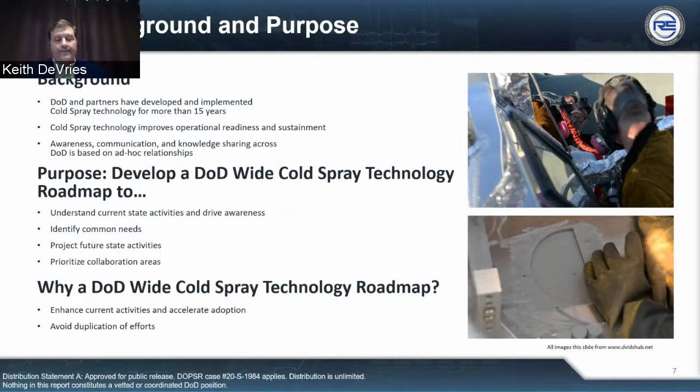Next slide, please. Shown here is a subset of the priorities identified by the team in the road mapping sessions.

The JDMC has commissioned work in several of these areas since the roadmap was published, with the express intent to expand understanding and adoption of cold spray as a cost, and more importantly, time savings approach to sustaining our vehicles, our vessels, our platforms, and our systems for warfighter use.

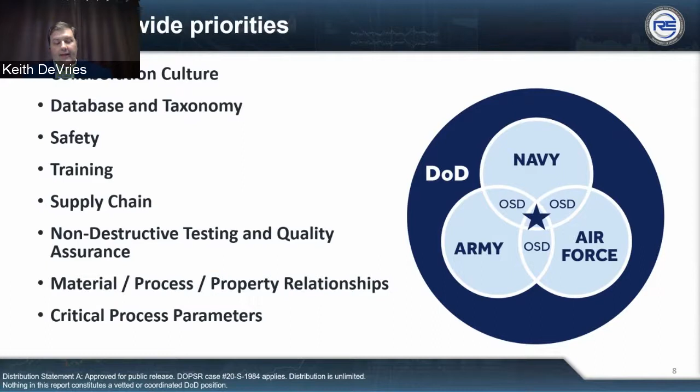The panel members gathered today will be expanding on their individual service efforts to address roadmap challenges and further their warfighting capabilities by developing cold spray as an industrial process.

Next slide, please. Our first presenter is Bill Baker. He is from Marine Corps Logistics Command in the Maintenance Management Center, where he is the lead engineer for the MMC and provides engineering guidance, technical support, and technology insertion for the workload executed through MMC and their commercial sources. Mr. Baker, it is over to you.

All right, thanks, Keith. Hey, this is Bill Baker. I just want to give you an overview of where the Marine Corps is going as related to cold spray. So we can go to the next slide, please. Okay, one more.

So a little bit about us. Marine Depot Maintenance Command is our official title for our Marine Corps depot. There is only one Marine Corps depot, but we have two locations. One is in Albany, Georgia, and the other is in Barstow, California. Similar capabilities at each of our plants, and they work the same types of equipment.

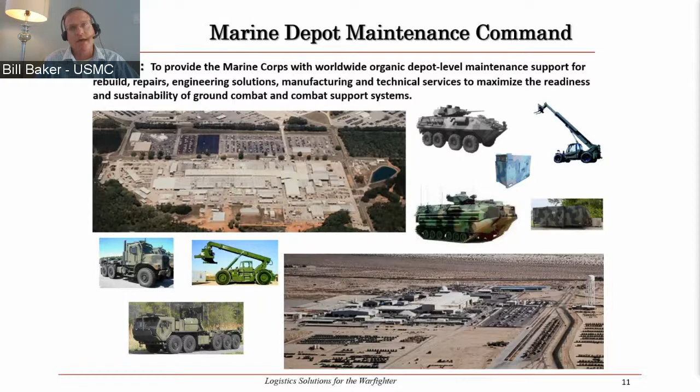We basically rebuild all types of ground combat equipment. So if you think about armored personnel carriers, light armored vehicles, engineering equipment like forklifts and bulldozers, we work trailers, trucks, Humvees, anything you can think of on the ground side, even rifles. So when we talk about cold spray applications, we're talking about supporting this depot maintenance. We completely repair or rebuild these ground combat systems based on our customers' requirements. During that maintenance operation, we're going to have things that need repair, and then we bring them back up to basically condition code A, which is like new.

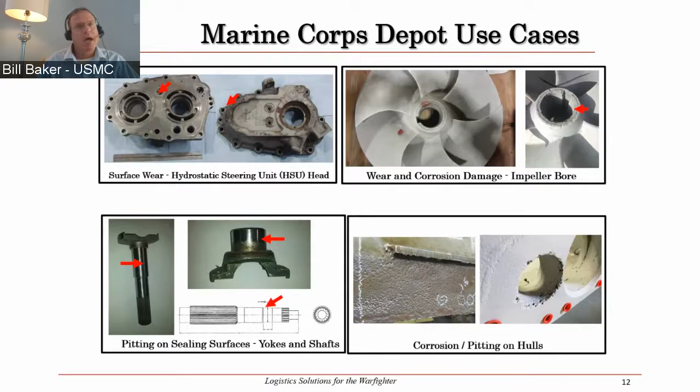I just want to give you an overview of some of our use cases. So the Marine Corps is just getting started on cold spray applications. We actually talked about cold spray before - I went through my old notes with one of my old jobs, and in 2002 we looked at cold spray applications, but we didn't have the funding and didn't have the drive or the roadmap that we have today. So we're really excited to finally be pushing cold spray across the Marine Corps, and we're starting to get some of these applications.

The first one you see up there is our hydrostatic steering unit head. This is one that the Applied Research Lab at Penn State is helping us develop a repair for. This is a pump housing that has some significant wear on it. It's expensive and it's hard to get. So they actually developed some new spray techniques and innovative masking techniques also, because you see all those little holes are oil passages. They're able to come up with ways to get the coating to go to the edge of that oil passage, but still make sure the oil passage wasn't blocked.

So we're currently waiting on approval to use that. We're going to do some real world testing. Also, that impeller bore is another one that we're working on right now with Penn State, and actually the Army Research Lab is helping us with that one also. So inside that impeller, it's also expensive and hard to get, and that aluminum impeller wears over time and also has some significant corrosion issues. So they're helping us develop a repair for the inside of that bore. They've got a mock-up complete right now. Once that's complete, we're going to spray an actual impeller and do some testing on that.

So those in the Marine Corps are the only two applications that we're currently working on at this time - we're just really getting started, the first two. Down at the bottom of the screen, you see some potential future applications. Every piece of ground combat equipment that we have has a shaft on it, and all those shafts have seals or O-rings that keep the oil passages sealed. And those O-rings and seals cause damage and pitting over time. So we're hoping that we can actually repair these yokes and the mating housing so we can bring these pieces of gear back operational.

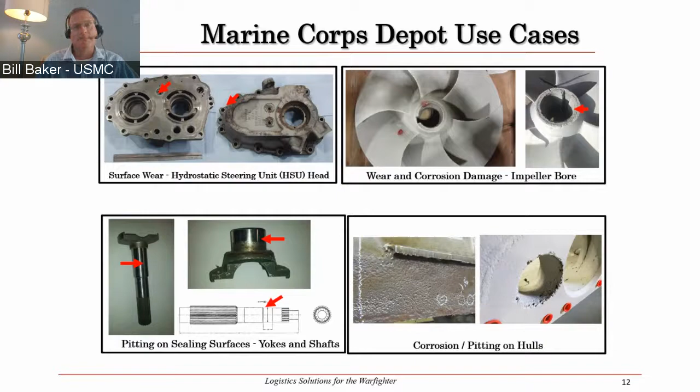For the Marine Corps, we wanted something semi-portable so that if we had to move it, if we needed to take it to a vehicle instead of bringing the part to it, we made sure that it was able to reposition, move it to a different building, move it to a different vehicle, move it outside, whatever we had to do - we wanted to be definitely flexible. Our Barstow plant has a similar system on their budget for FY22, and they actually have some low pressure systems that they've had for probably about 10 years. But for the Marine Corps, we don't have a whole lot of applications for those low pressure systems, so we're going to these high pressure systems that you see here.

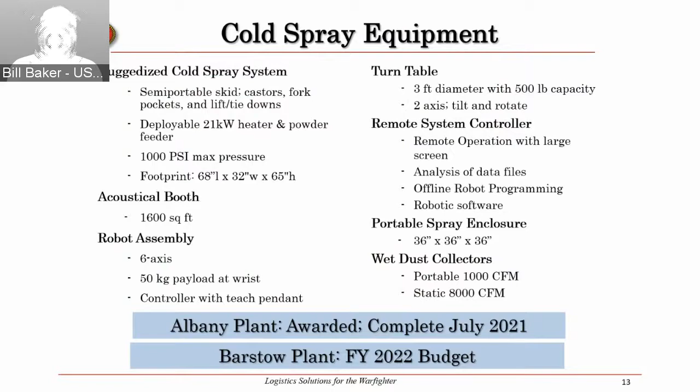So just to wrap things up, we're looking to repair all types of components and parts as part of our ground combat depot maintenance. Our focus right now is on depot maintenance, but the fleet has the same type of applications too. They're already calling us on some particular issues, so as we get smarter, better, we're going to take our lessons learned to the fleet too. We can also repair their parts at the depot and send them back to them.

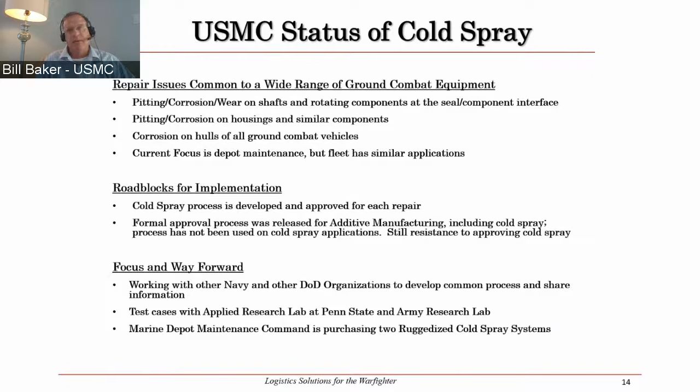We are having, as part of our roadblocks, some issues with approval. We only have 2 parts so far, but getting approval for those can be difficult. So we've been working with our OSD team and other members of the Navy and the Army to come up with better ideas on how to get these cold spray applications approved quickly, and I think that's going well. We're going to follow the same process we have for additive manufacturing, so we think that's going to help us make decisions a little bit faster.

Like Keith said, we're working with the Navy and other DoD organizations to really push this technology. Because we are part of the Department of the Navy, we're working directly with them every day on cold spray applications, trying to steal as much from them as we can because they're doing great work. And that's all I have for today. Thank you.

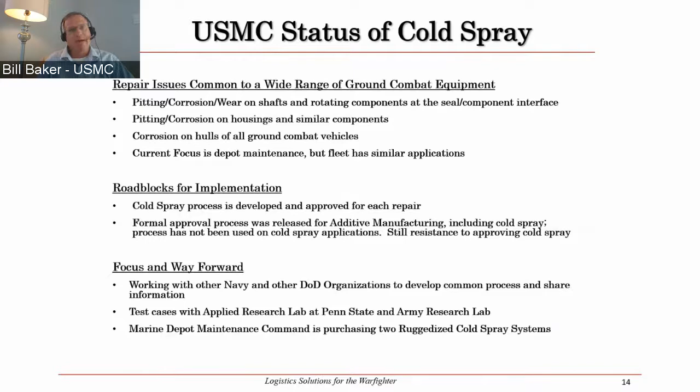Thank you so very much, Bill. I'd correct you only minorly - we're not stealing from the Navy, we're leveraging the Navy. Yes, sir, I like to call it stealing, I'm from South Georgia. Thank you - it's a very honest way of approaching it.

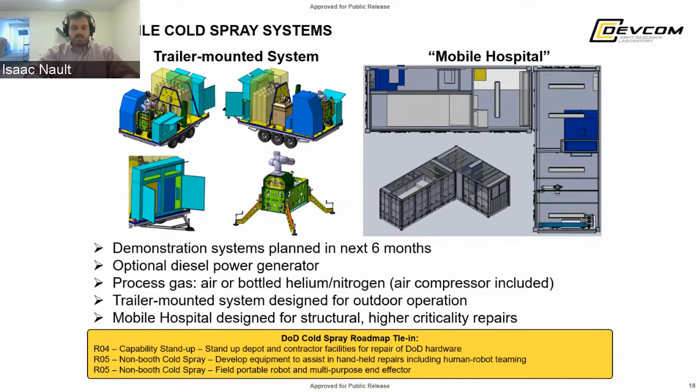There's a lot that goes into additively manufacturing parts with cold spray, and there's a lot of development going on there, with a lot of tie-ins to the cold spray roadmap. One of those tie-ins is we're developing methods for processing deposits after cold spraying to enhance the material properties, and that ties into priority number 7, process enhancements.

We've also developed software for developing tool paths to manufacture parts to near net shape, and that ties in with priority 8, engineering for structural and critical applications, and priority 12, part manufacture.

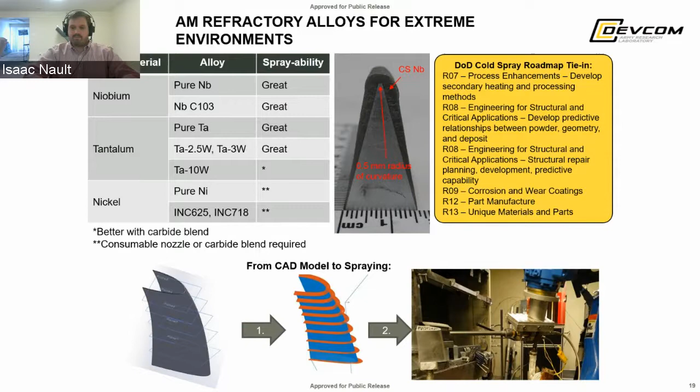We have developed and commercialized coatings, powders rather, for wear and impact protection. These are based on blends of carbide and metal, and we call them WIP powders, where WIP stands for wear and impact protection. We have commercialized 3 primary varieties. You have WIP C1 and WIP C2, which are a little bit cheaper to manufacture and can be sprayed with nitrogen. WIP W1 has better material properties, so that's really for higher criticality applications, but has to be sprayed with helium, so it's a bit more expensive.

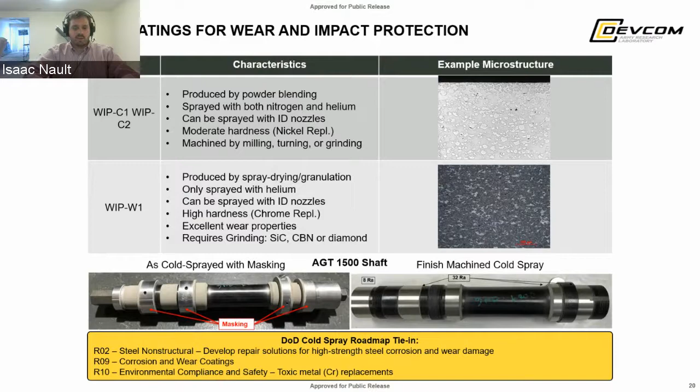These coatings for wear and impact protection tie into the roadmap through priority 2, steel non-structural repair, because this is an ideal material candidate for repairing high-strength steels, and also priority 9, corrosion and wear coatings, and priority 10, environmental compliance and safety, because this is also an ideal material for replacing toxic chrome coatings.

We're using cold spray for structural repair, and structural repair is defined as a situation in which you would expect that the cold spray deposit will bear a significant amount of load. So we're talking about more than just coating here. And this ties in with the roadmap for priority 8, engineering for structural and critical applications.

Much of the work we've done in structural repair has been focused on aluminum alloys. We've developed processing conditions and best practices for structural repair of aluminum. We've also commercialized powders that are pre-processed, such that when they are properly sprayed, they will have ideal material properties for structural repair in the as-sprayed condition. So there's no further processing required, which is critical for repair applications.

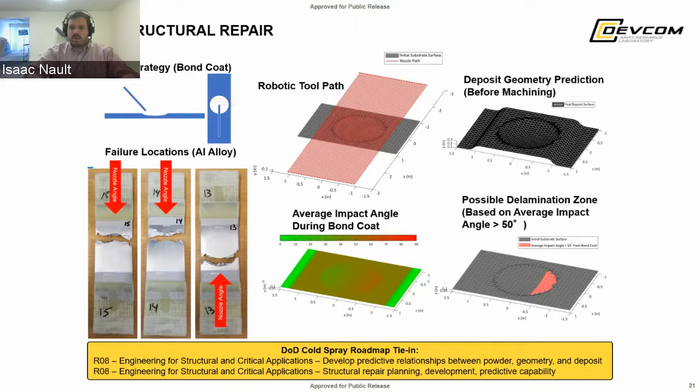Finally, we're using cold spray for inner diameter coatings, and this has been made possible thanks to the design of miniature nozzles. We've designed nozzles that are actually capable of fitting in inner diameters as small as 2 inches, for both WIP materials and aluminum alloys. The aluminum alloys are a little trickier because they require a consumable high temperature polymer nozzle, but we have developed that at this point.

These all tie into the roadmap through priority 6, engineering, and priority 7, process enhancements, because we really had to understand the relationship between nozzle design and cold spray coating quality in order to design these nozzles. And so that's what I have for today. Thank you.

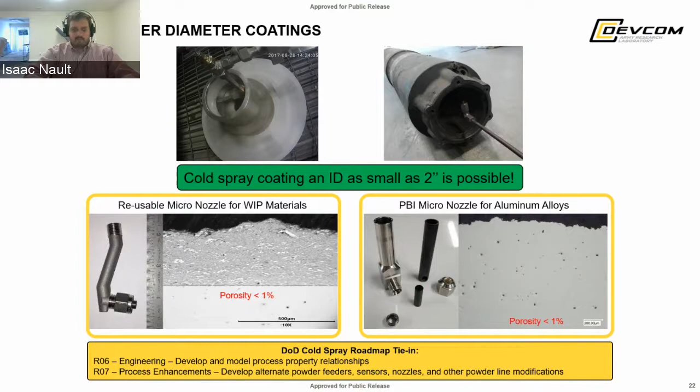Thank you very much, Isaac. It's always exciting to see where the Army is taking on new applications for cold spray and manufacturers, in cases like the nozzle design, to give additional tools for our operators out in the field. So thank you very much for that Army perspective.

Next in our lineup is Jeff Campbell, the cold spray project manager for NAVSEA. The Navy will be represented twice today. There is the NAVSEA component, which is surface and undersea vessels, and then NAVAIR, because their use case for many technologies, and cold spray is no exception, is different, so we'll hear from them later. But NAVSEA is our first Navy representative, and that's Jeff Campbell. Jeff is the manager for the development and fielding of cold spray technology across the NAVSEA organic and defense industrial base. He's been instrumental in instituting cold spray as a service, a new model for how we develop and deploy cold spray for the organic industrial base. I'd love to turn it over to Jeff to hear where NAVSEA is taking cold spray. Over to you.

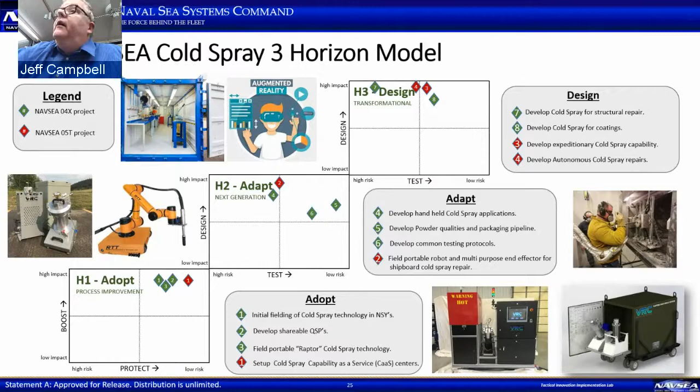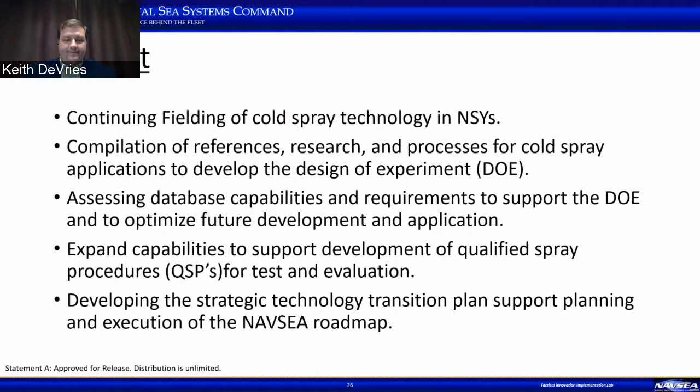Okay, so this slide I pretty much covered, continuing fielding cold spray technology. So what's next? Handheld cold spray applications, similar to what we do with welding. We used to do a lot of robotic welding, and now we're doing more handheld welding because we've proven the process and the coatings for wear and corrosion. So with structural repair, we're working with Penn State, the Army, and Northeastern University on looking at helium recovery. The structural repair is going to require using helium, so how do we do that more efficiently and effectively? And we're also working with the universities for preparation of the repair site with laser ablation or plasma blast.

And I will give Fred some time.

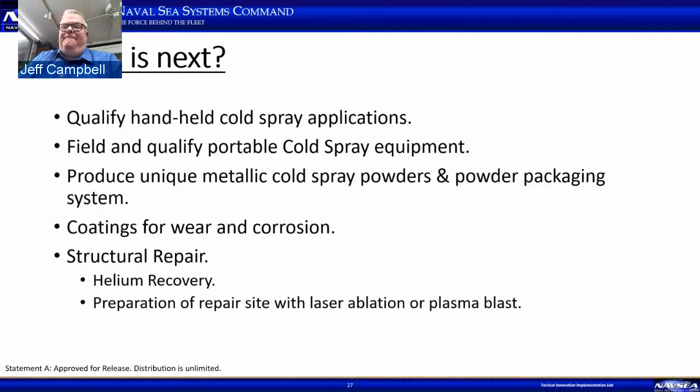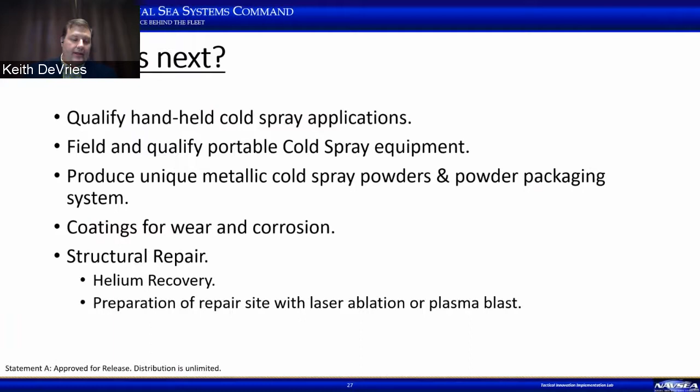Thank you, thank you Jeff. As I can attest, when you start talking cold spray, not you Jeff, but really any of our panelists, it's a field of passion, and it's hard to wrap up our comments rapidly. So thank you, Jeff, and I want to turn it over now to Fred Lancaster out of NavAir. All of our panelists are advocates for cold spray. I would call Fred my evangelist. He's been on the front lines, getting the word out there as a capability and a process that we really need to be putting in the hands of our users. So all of the biographies are on the website that announced this webinar. So rather than read the details out of Fred's biography, I'm going to turn it over to him so he can tell you all the reasons why cold spray is the best thing since yellow butter.

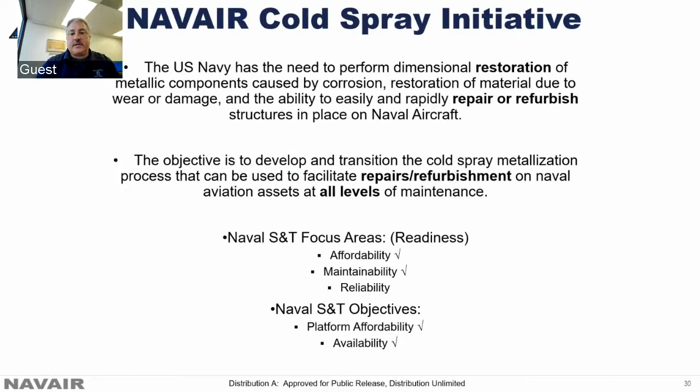Then comes along cold spray. It's a thermal spray process, lower temperature. We can process using it manually, robotic, doing it on aircraft. So it really fits into the Navy's initiative, looking at affordability, maintainability, reliability, all those things that contribute to readiness, so we can repair and refurbish parts. Plus it's affordable. Out of all thermal sprays, you can get into doing repairs on aircraft relatively cheap. Next slide.

So just to give you a snapshot of where we've been: the past 10 years it's pretty much been primarily developing the processes. So now, as we come into 2020, we've got about over a half dozen proven processes that we use for dimensional restoration. We've also got qualification from engineering that we ran through, so now anything that's a blend and fill, a dimensional restoration, we can use cold spray on. The next generation of processes, looking out the future five years, is structural repairs, and we're getting some headway into that currently. We're actually getting fatigue credit back, and all parties involved here in this meeting have participated in that in some way. We've standardized our processes, standardized our work practices, demonstrated a robotics on-aircraft system. We have systems in all of our depots, and we're using them in production. So, next slide.

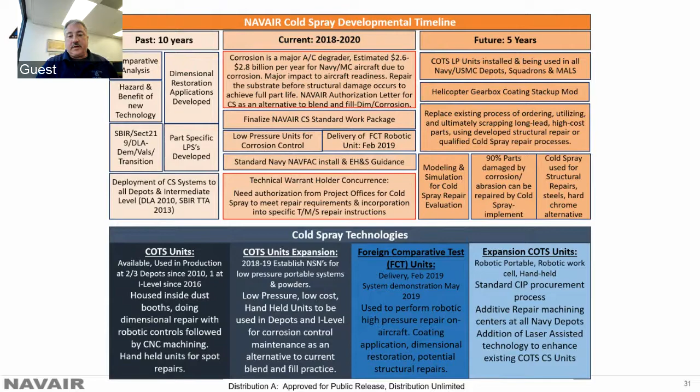In 2019, you can see within less than 10 years, just within the Department of Defense, cold spray has really expanded, and this is showing you that we're expanding use in products. We're using it in acquisition programs, new programs. We're also using it heavily for refurbishment. Okay, next slide.

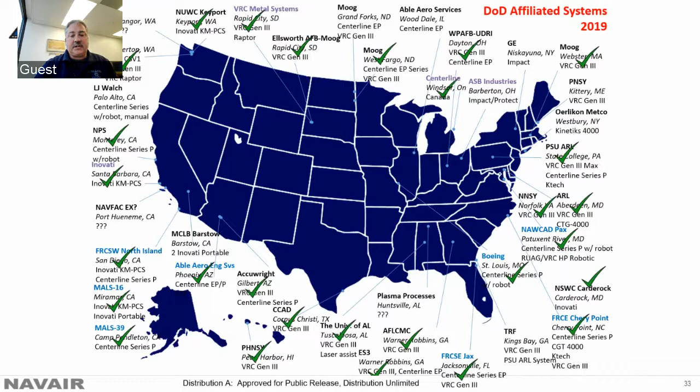At our fleet readiness centers, we're fully equipped. We've been using low pressure systems for years. You can see out at FRC Southwest, North Island, that's one of our main engineering facilities for cold spray. We've been using cold spray in production for over 8 years.

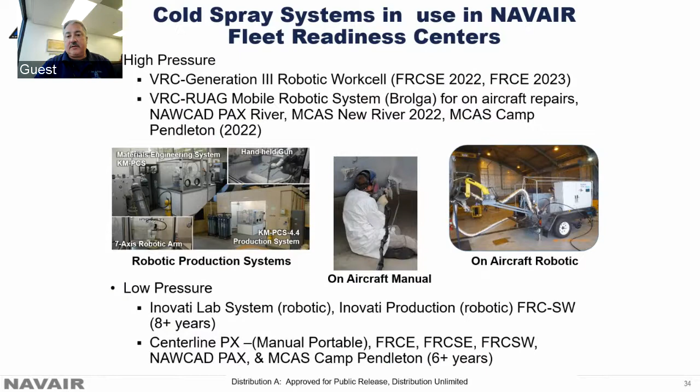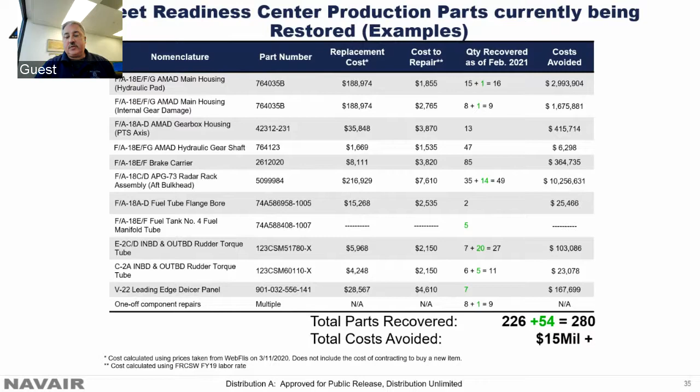So what's our path ahead? Restoration of parts — I'd call this wanting every squadron, every type of aircraft, to have cold spray, to have all the squadrons outfitted so they can repair corrosion on their aircraft with portable cold spray equipment. We call this death by 1,000 cuts. If we can repair the metal with metal, then we will never get down to the structure.

Enhancement — in some of our restorations we've been able to modify a current asset to actually last longer by putting down, for instance, a better wear coating, a less corrosion-prone coating. And then repair is the next thing, where we can actually add some fatigue credit back and some tensile strength back into the part.

But one thing you've all seen today here, especially with NAVAIR, is training. Jeff said training is a big thing, and we're all across the board in agreement with that. We use things like augmented reality and process modeling, getting training modules out there for our aircraft maintainers, who are the YouTube generation — we need that type of training equipment and modules out there for them to use.

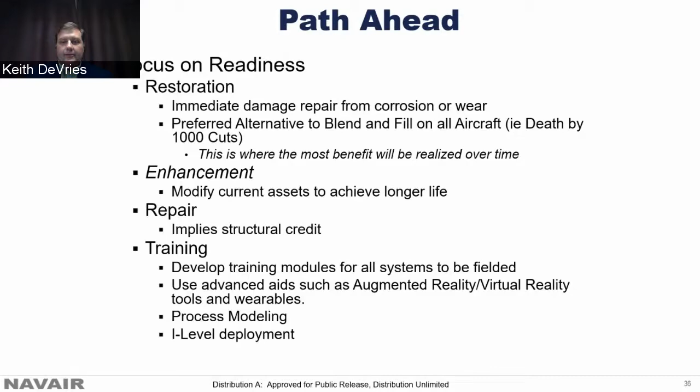First question goes to Jeff Campbell with NAVAIR — Jim Fisher asks, are there any issues with using a portable system within a ship? This comes from powder overspray and the safety and environmental concerns that come with that. I know you guys have been working a lot on addressing those. So Jeff, over to you to tell us what we've learned in that realm.

Yes, that could become a huge issue, and we're working with our partners to develop portable dust collectors as well as portable containments. That's an issue we definitely have to overcome before getting approvals to use cold spray shipboard, as well as having changes to the process instructions that give us approval to do those repairs shipboard. We definitely don't want metal particles floating around in the air on a submarine or a surface ship.

Awesome, thank you so much, Jeff. Early on, we got a question about whether cold spray is a process that could be used to salvage in-production items that may suffer a machining error, specifically talking about an undercut on a titanium forging.